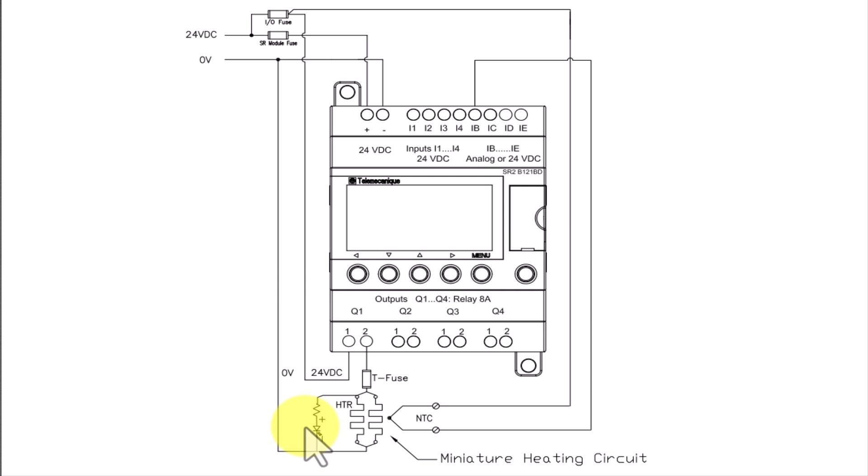I now have a PLC style diagram open for the same circuit. You will see both wiring diagrams and schematic diagrams. Basically they are diagrams for the same equipment, but a wiring diagram tries to show the physical layout of the equipment.

A schematic diagram just shows the workings of the circuit and the connections. If you look down on line 108, you have that 2-wire temperature sensor connected to input B, with a description on it. Over on the output side of the drawing on Q1, we have the heater arrangement connected. There's a dashed line drawn around all of the heater equipment to show that it is self-contained in one unit.

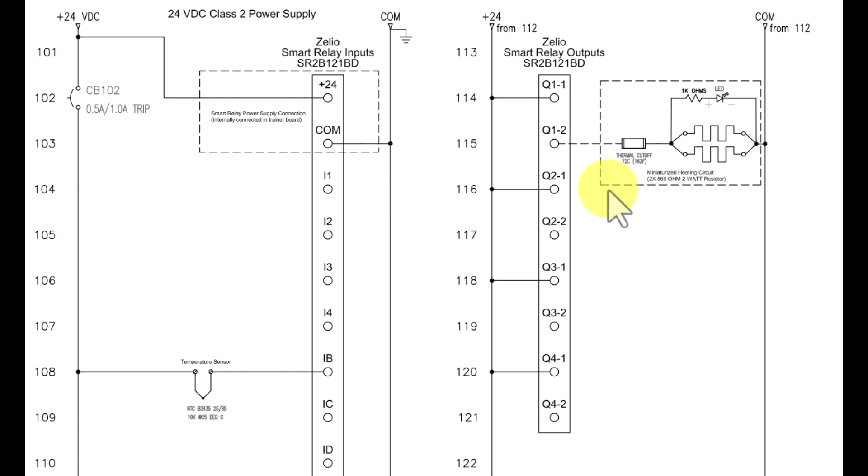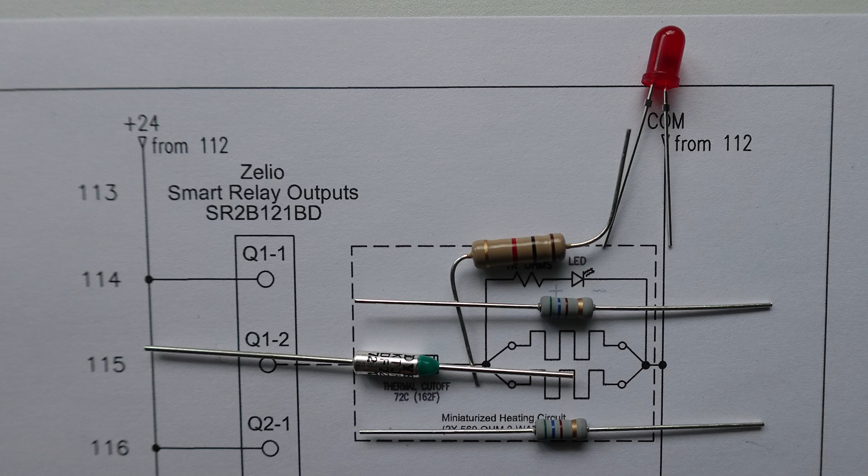For a visual aid, I have laid out the thermal cutoff fuse on the diagram along with the 2 resistors that we'll have used for our heaters. I'm showing the resistor in series with the LED that will indicate when the heater circuit is energized.

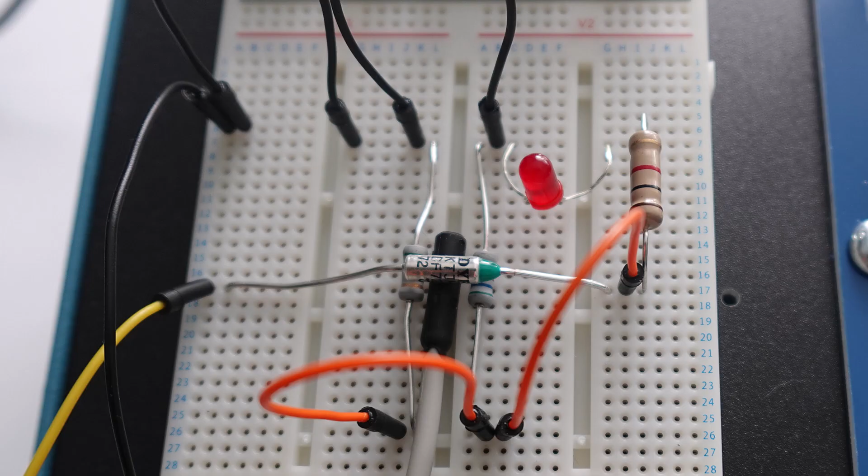The circuit components will be connected to the interface board that represents the smart relay inputs and outputs on the SRT100 DAI Plus training board. The components are placed on a circuit experimenter board. I will proceed now with programming, then power it up and test.

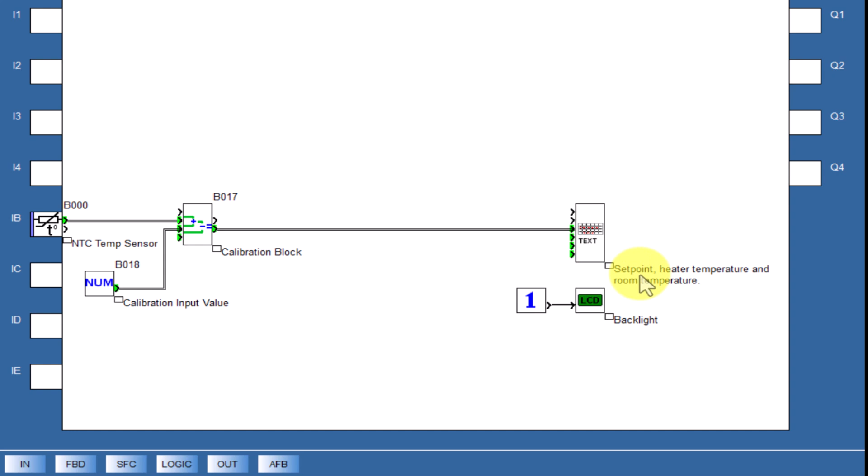To save time and to keep this video from getting too long, I have the setup from the last video. I have the NTC sensor connected. The calibration block is inserted, and we have a text screen that shows the room temperature, and I've adjusted the text to say that we will have a set point also in that text block.

So let's put an output in the Q1 address, and I will double click on it and we'll change it to look like a heater. So we have a heater output on Q1.

The block that we are going to use to control this heating system is called a trigger or Schmitt trigger. The whole idea behind using a trigger is it has different on and off set points. It heats between 2 points. You do not want your system short cycling, and that applies to a cooling system also. You can use this block for heating or cooling.

The output is digital, it's either on or off, and it's going to control the heater. We have 4 inputs. One of them is an enable function. If we don't connect it, it will automatically work. The first green input is the value to compare, so that's going to be our sensor that's measuring the temperature.

And then the 2 other inputs are used to set up the actual temperature that you want the room to be at. So we have an on-to-off set point and an off-to-on set point. The on-to-off will be your higher value - that's when you want your heater to turn off.

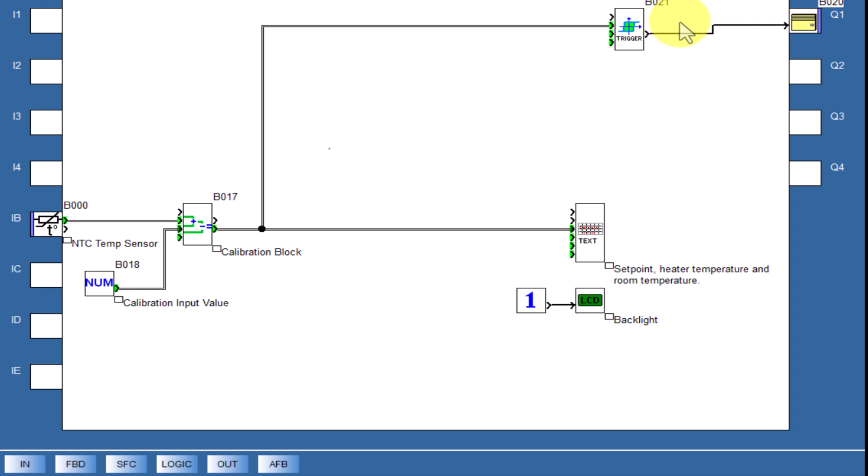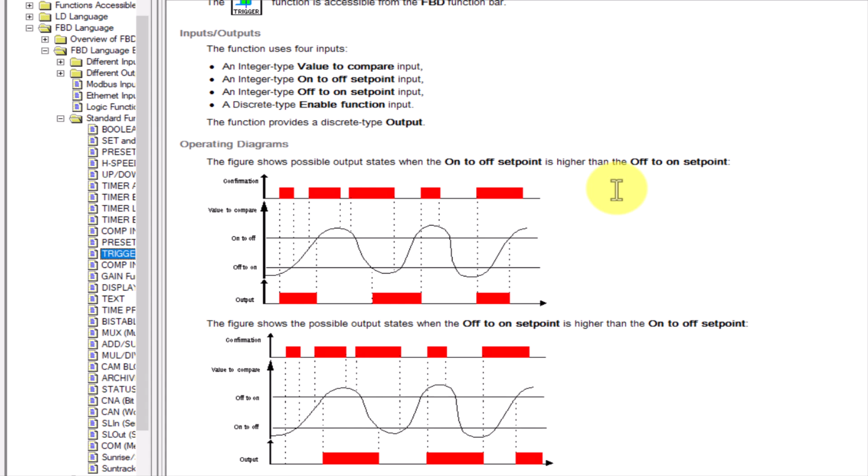In the Smart Relay software, if you want to learn or find out how anything works, you click on the device itself, the function block in this case, click on the help menu, and all of the information you need for the Schmitt trigger is explained - it has 2 diagrams, one for heating, one for cooling. I like to learn by doing in this case, and that's what we're going to do.

We're going to get it to work by testing and making adjustments. So what we're going to do now is connect a number block to this on-to-off set point, and that will be the temperature that we want the heater to turn off. So we go down to the input menu and get ourselves a number block. You can put that in and connect the output from the numerical constant to the on-to-off set point. And I'll put a comment in there so we know what that is.

Very important - heating set point. And it is adjustable. We will allow anyone to adjust it from the front panel, and I'll show how that's done. In this case it's degrees Celsius, and you can set it up for Fahrenheit - it's no problem, you can set it up for operation in the US of A.

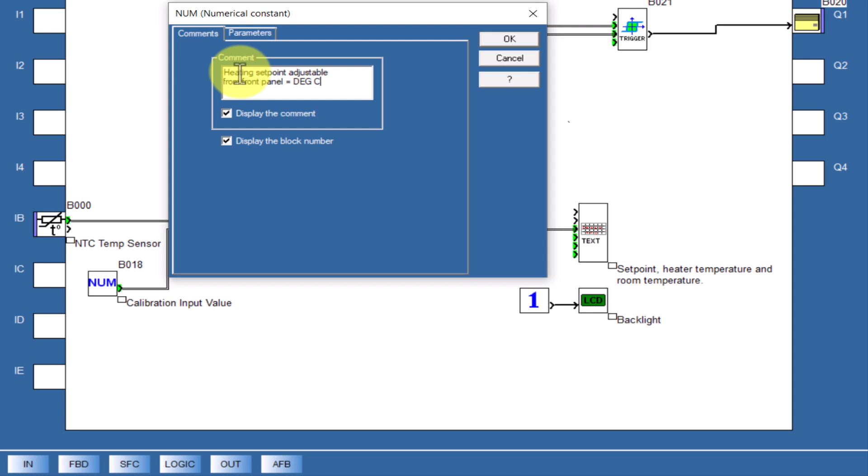Okay, I'll click OK. So that's the number, and we can start by putting a value in there if you want. Room temperature is 20 degrees. I'll just set it at 20 for now and click OK. And again, we'll be able to adjust that from the front panel.

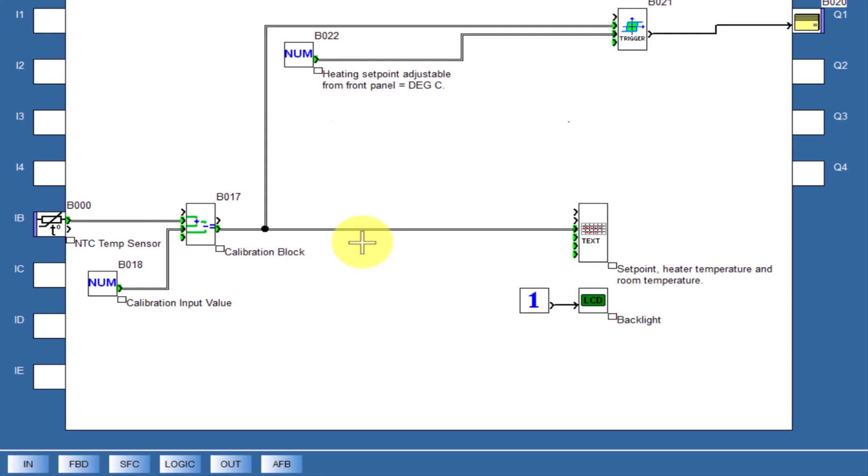So in order to do that, we need to connect the output of that block to the text screen so that value is visible. We'll set that up in a couple of minutes. So basically we have our off setup - when it reaches the room temperature, it'll turn off. But now we need to tell it when to turn on.

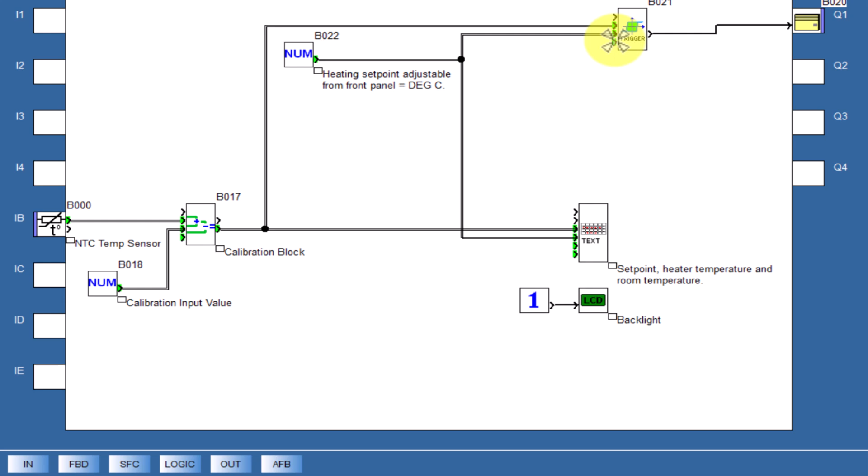So what we have to do is figure out at what temperature to do that. In this case, I'll set it up so that the off-to-on set point, in other words when the heater turns on, turns on at 1 degree less than the desired temperature. That way, as I mentioned earlier, it won't be toggling on and off and short cycling - we'll have a little bit of a margin. The reading I've been doing tells me that most thermostats have a plus or minus 1 degree differential, so we'll just do it on the minus side. And if you want, you can adjust it, or we can adjust it as required.

So what we're going to do is get a little math block here - it's an addition or subtraction block. And we'll take the calculation output and connect that to our lower connection here, the off-to-on set point. And then we need to put a number input and a reference value.

So what we'll do is take the set point value, and if it's set right now at 20, we'll allow for our off-to-on to drop to 19. So we need to subtract 1 from that value. That'll be a moving scale, so if we change the temperature, it will stay constant.

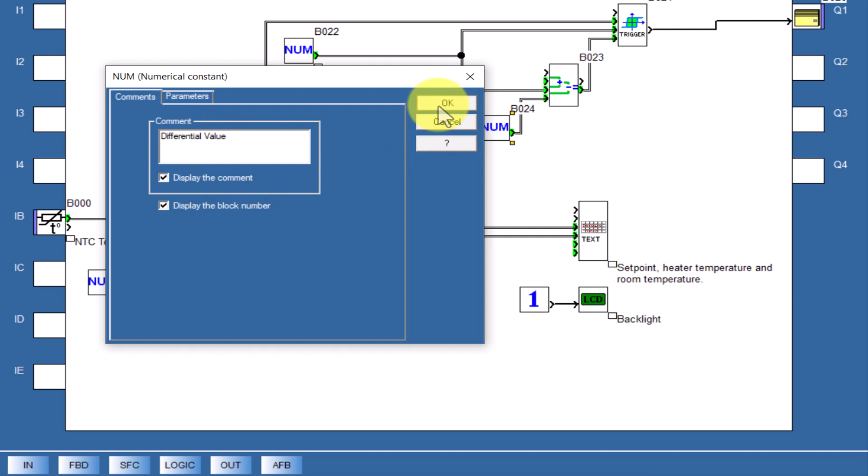So we'll take that and connect it to the terminal second from the bottom. And right below it, we will put a number, and that will be our differential value. If we double click on this, it will be adjustable. So under comments, because it's a differential heating system, we will call it our differential value - I could say adjustable, but we know it will be. So I'll click on that, and we'll give the math block a name - basically we'll call it subtraction.

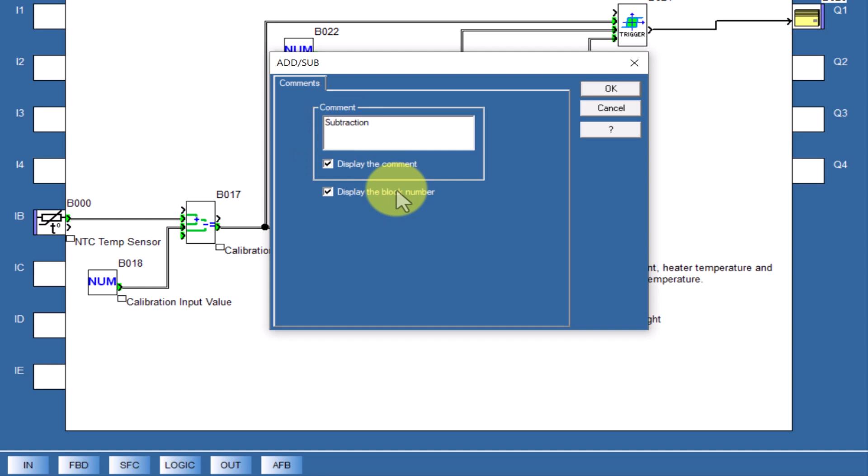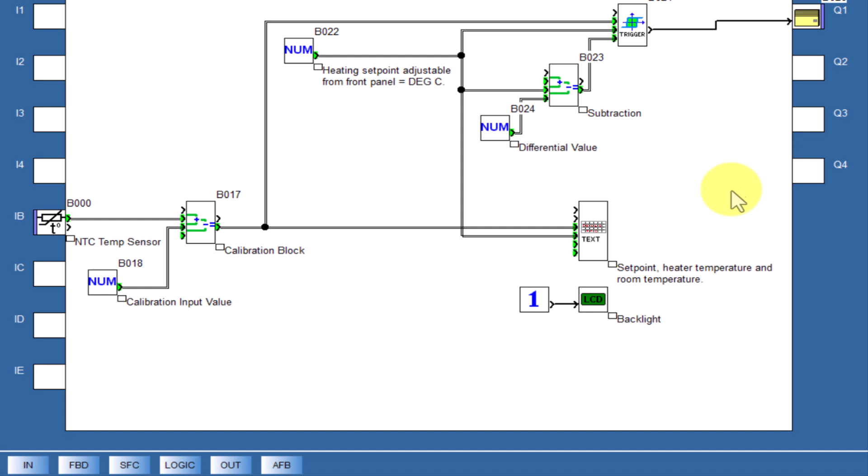If we wanted to have an adjustment on the heating, turning the heater off, we could do the same, but we would have to use an addition to expand that differential value. So I'll put a value of 1, which means the heater will turn on. In this case, because my set point is 20, the heater will turn on at 19 and turn off at 20. But for comfort you can adjust it, or if you want energy savings and longer cycle times, you can change that value.

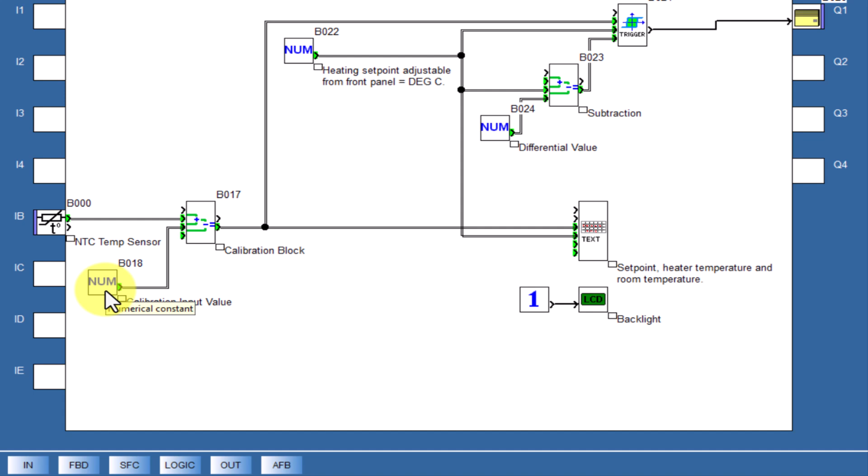If you want to prevent someone from making adjustments to certain settings, in this case the calibration input, once it's set, if you want it to remain that way and not be tampered with, double click on the number block in the parameters window and check locking. An operator will not be able to adjust that value from the screen. Now I will set up the screens.

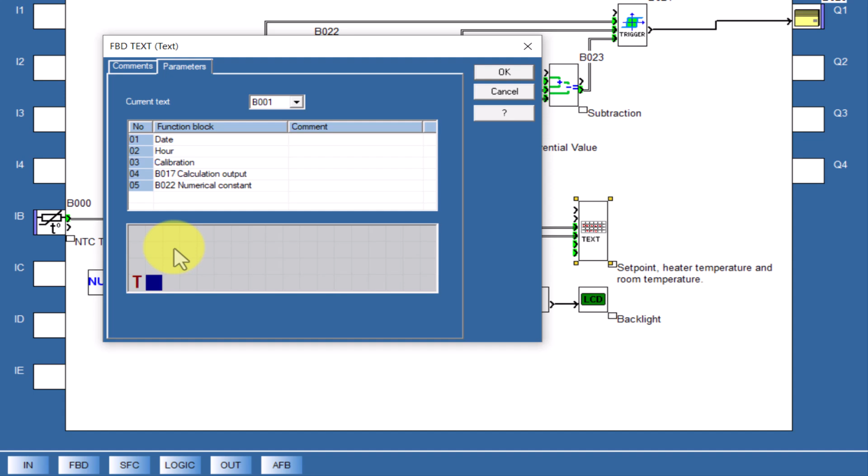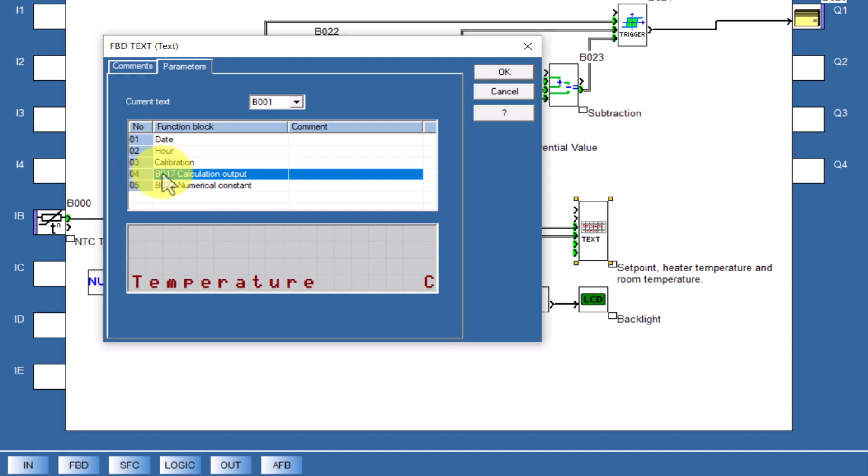So we'll put some text in showing the room temperature and the set point, what the actual heater set point is. We'll start with the temperature, and keep it simple for now. You can adjust that however you like. Temperature, and over on the far right it will be degrees C. The room temperature is this block number 4 here, this calculation block that comes from our temperature sensor through this calibration block right along here.

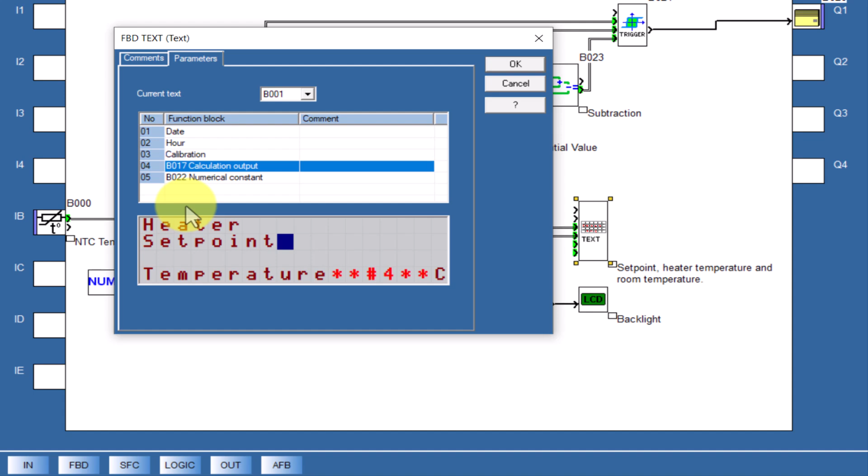The next text block we'll set here, we'll call it heater set point. So the set point for the heater temperature, and again it will be degrees C, and it's this one right here - block number 5. It will go in there, and we have a little space up here so we can put our hour in. We can get date in too, or not - oh no, we'll just stick with the hour.

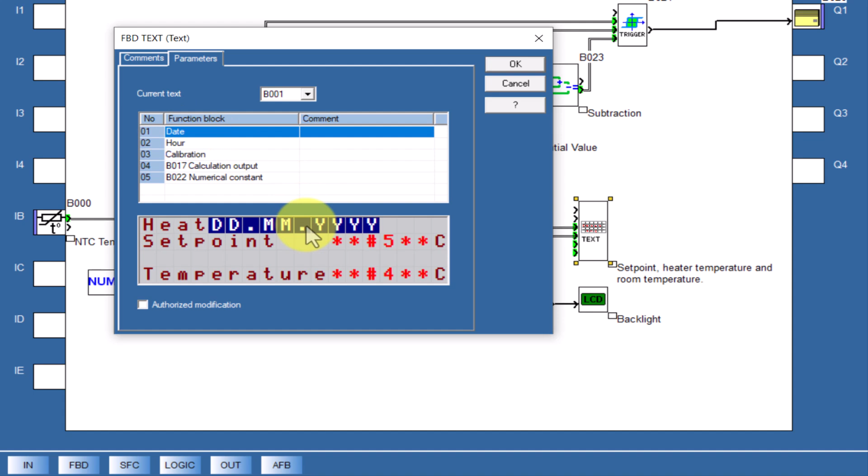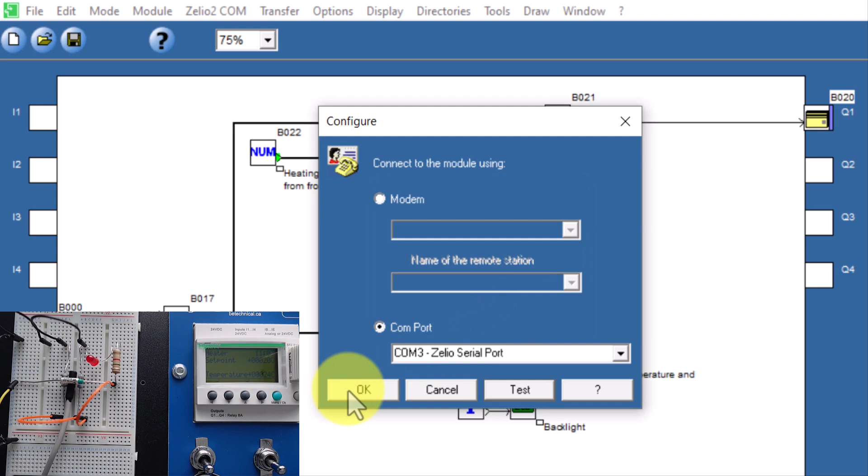Okay, so let's go online. We'll download and go online. It is time to download and test. It's very important to have your communication set up - you actually want to do that before you even start programming. I'll click on transfer in the upper toolbar, go down to communication configuration and open that. I'm using a USB to serial cable - you can use Bluetooth also, but in this case I'm connected through that USB cable. If I click test, it says connection successful, meaning we're talking to the controller. I'll click OK. Now I will transfer the program from the PC to the module.

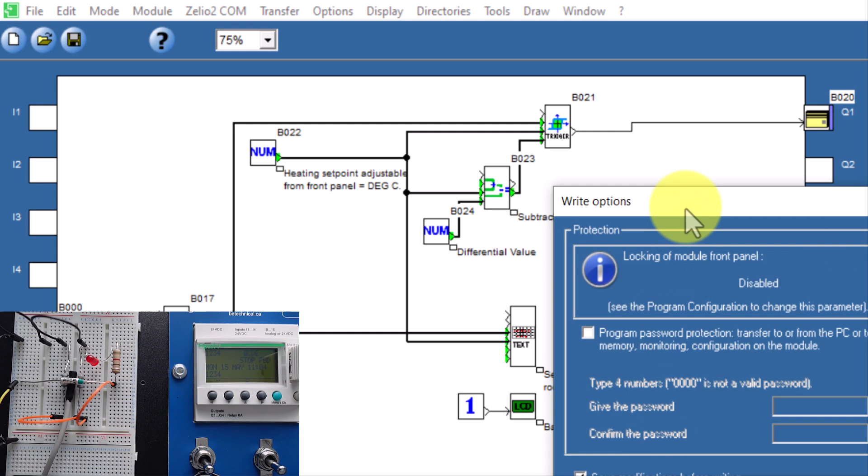It will give you a warning that it's in run mode, so if you're in the field and connected to a car wash, you will stop the car wash if you activate this stop command on the module. I'll go ahead and do that - I know it's safe. We want it to automatically go into run mode; again, you need to think about that, in the field you may not want to do that. I'll click OK. It's going to erase the program that's in there. Click yes, and it will transfer in.

A very powerful function of the Smart Relay is using monitoring mode. If I click on monitoring mode, it will connect to the controller and supervise all of the input and output devices and display values. We can take control of the actual devices or function blocks in the program. We can also view the front panel and control it remotely.

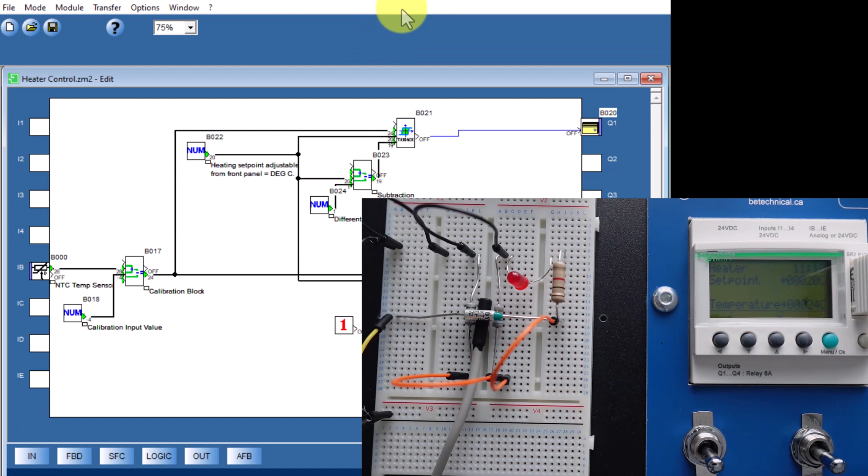So if I click on window, front panel, I brought up the front panel. We are actually reading the process right now. I'll go over to the front panel and adjust the set point. Right now the temperature is 24 and the set point is 20, so it's a little bit warm in here - guess I've been working too much. I'll set it up to 30 degrees and we'll allow that temperature to increase up to 30. Now you'll see it change on this screen.

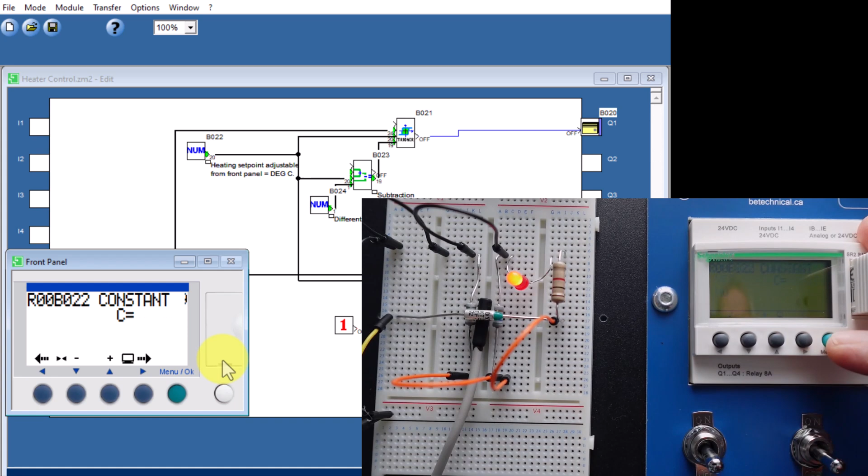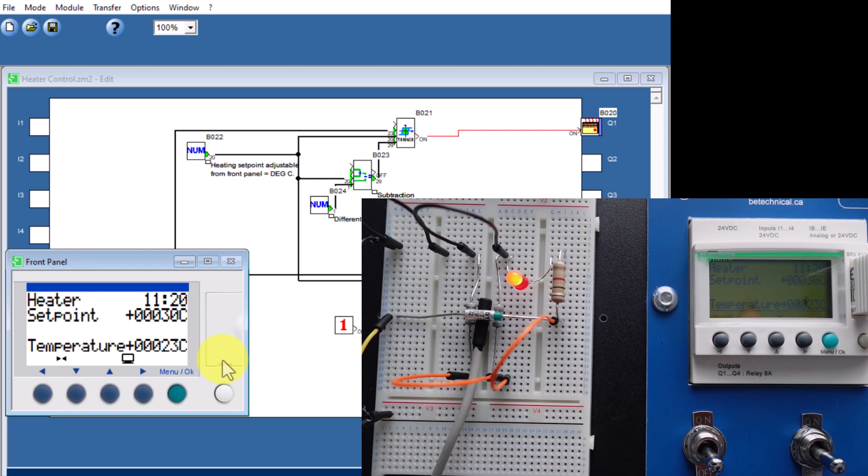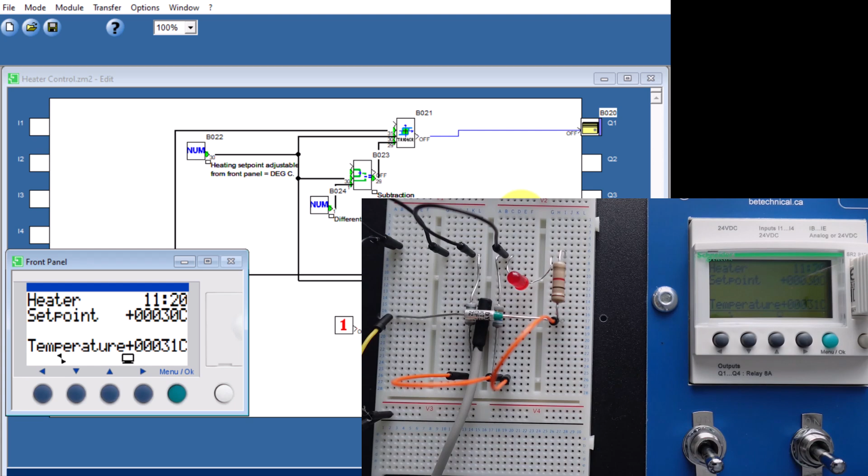Now I set it up to 30 degrees and we'll just let it increase to the set point. You'll notice that the heater is on in the program, and the LED in the field, the red LED, is also indicating that it's on. We're at 29, we're at 30, it just shut off. It just overshot slightly to 31. Now we'll see how long it takes to turn back on and what temperature it turns back on at.

You will notice as soon as it hits 30, it will not turn on. It will have to drop below 29 or at 29. We have that differential of 1 degree between the set point and the off-to-on trigger. Oh, there it goes - there's a slight delay. It turned on, it hit 28. Actually it turned on before that and dropped to 28. So we do have that differential control in there.

Now it's heating back up. With the scale of a building, obviously it would take a lot longer and it wouldn't respond as quickly as this, and it will shut off - there it goes. And that's it, that's our differential temperature control. And we can use that same function block for differential level control in tanks, pressure for air compressors, and so on.